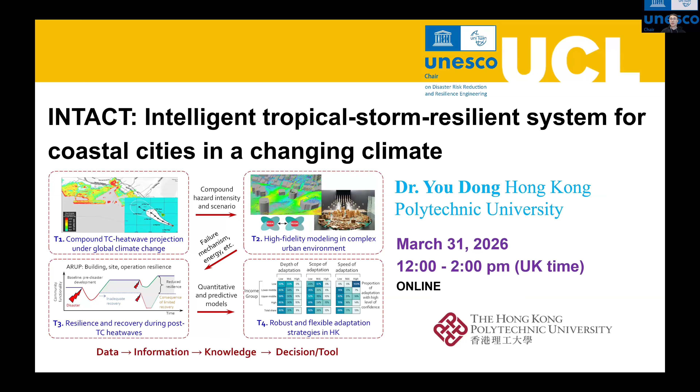Today's webinar. So the topic of today's webinar is an intelligent tropical storm resilient system for coastal cities in a changing climate, which is a very interesting and very relevant topic.

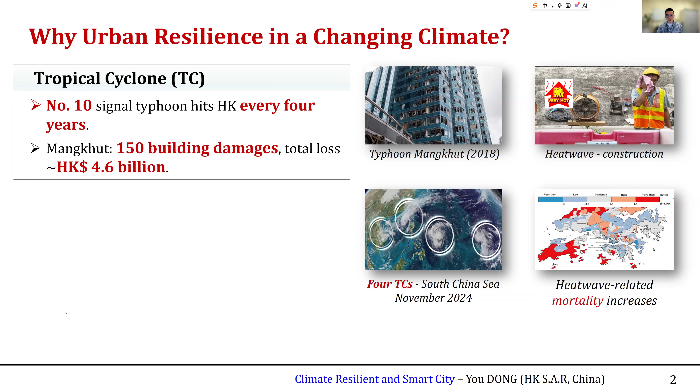I think the research challenge for engineers is how we could do the performance quantification in a life cycle context with different types of uncertainties. So this is for life cycle engineering. In my PhD, I worked a lot on how to do life cycle assessment and also prediction. We know that within service life, the structure has different deterioration and aging effects, and within service life it could be under different hazards like extreme events.

Then we do the repair, we should do the maintenance. And with the evaluation procedures, we have different types of uncertainties. We have to take the uncertainty into consideration. And we also have to consider the stochastic process with climate change and different hazard scenarios. By considering climate change, the stochastic process may become a non-homogeneous Poisson process. So this can become a more complicated stochastic process. So how to do this kind of evaluation is really, really important.

So when we try to evaluate climate change effects on coastal infrastructure to develop more resilient infrastructure, first we have to do this kind of quantification and prediction. It means we have to quantify the life cycle prediction and the multi-hazards by considering degradations like chloride-induced corrosion and carbonation. So we have different deterioration scenarios. But this is also quite a challenging problem because we have to consider different stochastic models. It's not only just PDF and CDF, we also have different stochastic processes for the hazard occurrence.

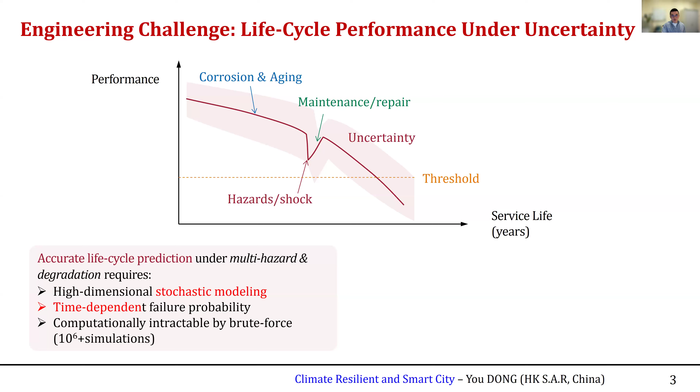By considering climate change, the hazard pattern may also change. So we have to consider different stochastic processes. And then we have to quantify the time-dependent failure probability, not time-invariant, by considering different hazard scenarios. We can use Monte Carlo simulation, but this is really time-consuming. That is the reason why in these evaluation procedures we can incorporate physics-informed AI to develop high-fidelity time-dependent assessments.

So based on this time-dependent reliability analysis, we could predict the infrastructure performance by considering different hazards and also climate change effects. So this part is regarding how to evaluate the condition within the service life of our coastal infrastructure, within 75 years or 100 years, how we could evaluate their time-dependent performance. So this is regarding performance assessment and prediction.

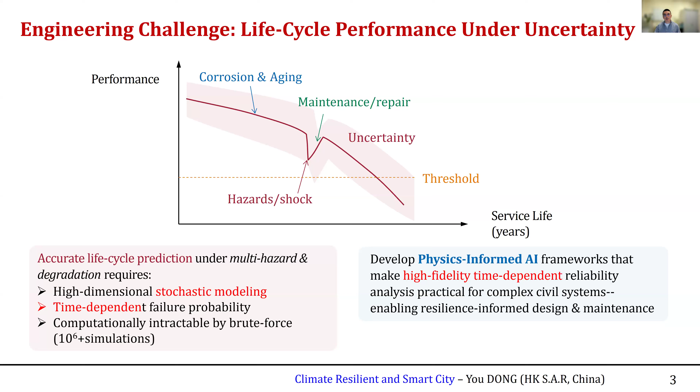Once we have this kind of prediction as an engineering problem, then we could consider their performance. We could consider durability from the material level to the structure level to the system level. And within the design, we have to consider different types of limit states. We have the ultimate limit state, serviceability limit states, and extreme event limit states. The extreme event limit state is maybe more relevant to resilience. But for the other limit states, we have to consider reliability and risk.

So based on their performance, we can do the evaluation and the prediction, then we could determine their time-dependent performance and also calculate the life cycle cost. So this is regarding the decision-making part. Previously we did this kind of evaluation for time-dependent reliability, risk, and resilience. I think the next step is how we make the decision. We have different types of objectives. We want to improve the performance, reduce the risk, improve the reliability, and improve the resilience within the life cycle. So this decision-making process is like an optimization problem.

Within the optimization problem, we can use different optimizers to solve these problems. But with climate change, once we include different types of uncertainties in this stochastic environment, we could think about how to use deep reinforcement learning to solve these problems. So this is within our research group. First, we try to do long-term predictions by considering future climate change and different types of uncertainties for time-dependent reliability and risk quantification.

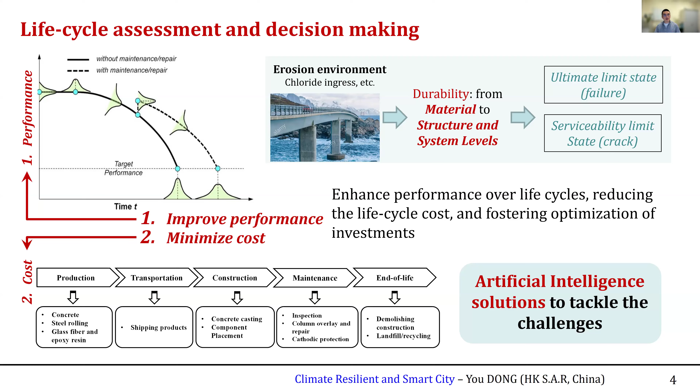After that, I'd like to take wind engineering as the example. This is our work with my previous postdoc, Jiayao Wang. Now she's a postdoc at Notre Dame.

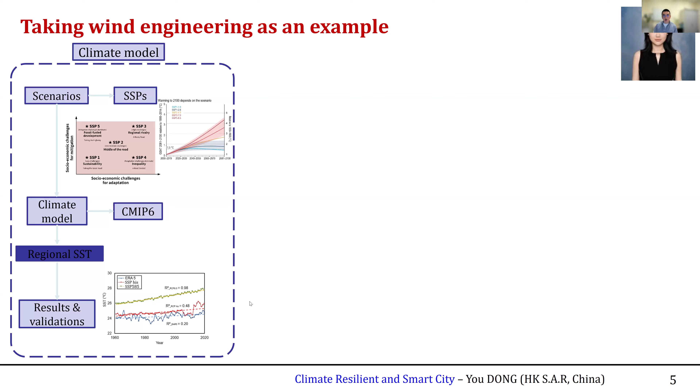For instance, first we do this kind of large-scale climate change modeling. We have different scenarios, SSP, RCP, and we also do this kind of downscaling from large scale to the regional scales. Then we could determine what the climate change effect is on our regional scenarios. Then we have to evaluate the climate change effect on the wind parameters, like on the wind speeds, on the wind directions, and we have to consider different wind profiles with and without climate change scenarios.

This is a kind of multidisciplinary approach. We have to work with climatologists. They give this kind of climate modeling, and we are doing the downscaling to evaluate the future climate change effect on the wind profile.

Once we have this kind of loading, we have to evaluate the infrastructure performance with and without climate change scenarios. We have to use the fragility model. We have to develop the failure probability under different climate change scenarios. So out of that, we could quantify the fragility. We could identify the vulnerability model. And we also do this kind of quantification for risk. I mean, we have to consider different types of consequences: we have the direct consequences, and we also have the indirect consequences.

Besides that, we also try to incorporate the sustainability and the performance indicators. So this is what I mentioned before. We could include different types of indicators in the decision making, in the evaluation procedures, like reliability, risk, resiliency, and also sustainability. And then we could use different optimization algorithms to determine which type of action we could use to enhance the resiliency of our coastal infrastructures.

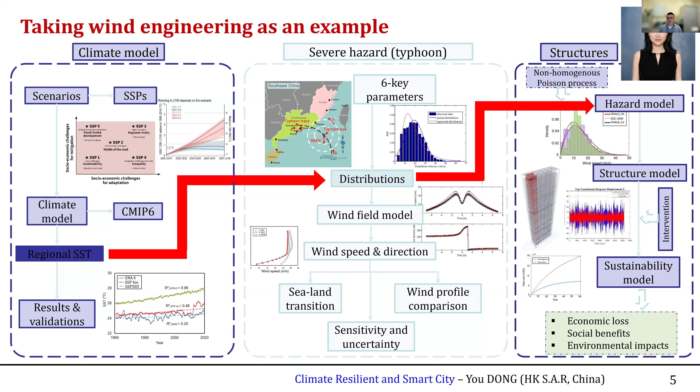Again, this is really quite interdisciplinary research. We have collaborations with people from climate science, but here we emphasize how to evaluate infrastructure performance under different climate change scenarios. Then based on this kind of prediction, in the future we will do adaptations by considering the climate change scenarios.

Overall, this is our group mission at PolyU. We really try to enhance urban resilience, like for the urban coastal infrastructures. And then we try to develop different adaptation strategies against compound hazards by considering the climate change scenarios. That means we have to work on the coastal bridge, coastal building, considering the dependency and the interdependency among different infrastructure systems. So based on our evaluation and prediction, we could think about how we could do the adaptation for our coastal infrastructures.

And this is the general approach. To solve these big problems, we have developed this kind of multidisciplinary group. We have people working on the climate change modeling. Then we focus on the coastal infrastructure. We do the downscaling to see what the flooding and winds are on coastal infrastructure. This means that we emphasize extreme hazards. Then we evaluate the effect of extreme hazards on the coastal community, what the damage is. We have the direct consequences, we have indirect consequences.

Besides that, we want to emphasize the recovery. We all know that resilience emphasizes recovery, emphasizes functionality. So we work with social scientists to evaluate the effect of climate change and extreme hazards on humans, from the socioeconomic perspective. Last but not least, I think the policy, the decision making, is also important. By using decision making, by using policy, we can make sure that our research outcome can benefit our society.

Again, we have formed this kind of interdisciplinary research group at PolyU, at our faculty. My part mainly emphasizes how to do the risk and resilience quantification, how to evaluate performance, how to do the prediction for the coastal infrastructure by considering the climate change effect, different types of uncertainty, and stochastic processes. And then we try to make decisions regarding the retrofit, regarding the adaptation of the coastal infrastructures.

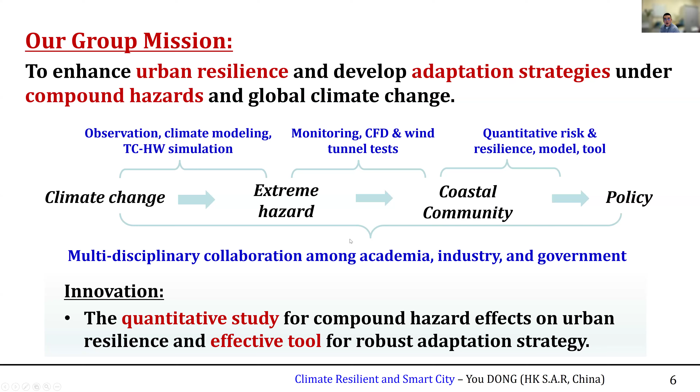I divided my presentation into two parts. In the first part, I would like to talk more about this kind of evaluation, this kind of assessment. Because once we do this kind of performance evaluation, we have to consider different types of uncertainties. We have uncertainty from the structure deterioration. We have uncertainty from loading; earthquakes and hurricanes are stochastic processes. So we try to develop surrogate models and also this kind of uncertainty quantification.

And also within this kind of time-dependent reliability analysis, we try to think about how we could use AI to solve this kind of problem for this kind of uncertainty quantification. So based on this kind of uncertainty quantification, then we could evaluate what is time-dependent reliability, what is their performance under different loading scenarios. So this is the performance evaluation part.

I'm sure that we are all quite familiar with this kind of surrogate model for uncertainty quantification. We have maybe a large simulation, a high fidelity finite element model. Once we run this kind of model, we have different inputs from the structure parameters, from the loading. We could have different types of observed data. So this red point is the data. Then we could develop different types of surrogate model, like Kriging model, PCE. We could use different types of surrogate model.

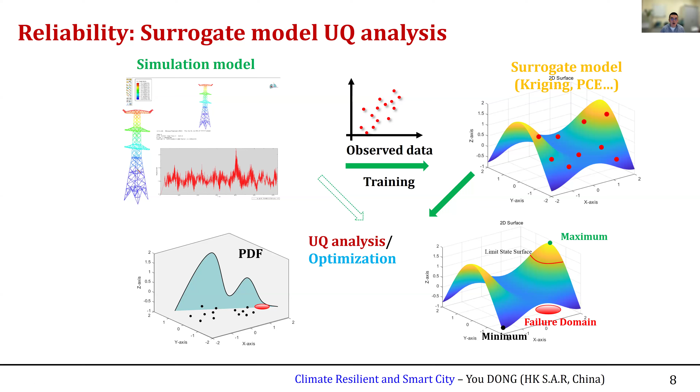But for this kind of time-dependent reliability, we may emphasize the failure domain. We more emphasize the failure domain. For this reason, we could do this kind of uncertainty quantification on the failure domain. We could do some optimization within this uncertainty quantification part. One of the used methods is adaptive learning, the adaptive Kriging models, and this is kind of a benchmark model for uncertainty quantification. I think we are quite familiar.

First, we have to determine the DOE, design of experiments. We have to identify the candidate pools. Then we could develop the Kriging model. But within this process, we could do different types of modifications and improvements to enhance the computational efficiency and also to improve the accuracy. So it means that we can change the learning functions, we could use different learning functions, and also we could change the stop criterion. In this way, we try to make this uncertainty quantification more efficient. I mean that we do not have to use 10 points. Maybe we can use 5 or 3 points and achieve good results.

So within my research group, because I have joined Poly for around 10 years, we have done a lot for time-dependent reliability analysis. Basically, for time-dependent reliability analysis, we could base it on sampling-based methods like Monte Carlo simulation, importance sampling, subset simulation. This is high accuracy, but if we involve a high fidelity model, this is quite time consuming, so then we could develop the surrogate model. This is also one option.

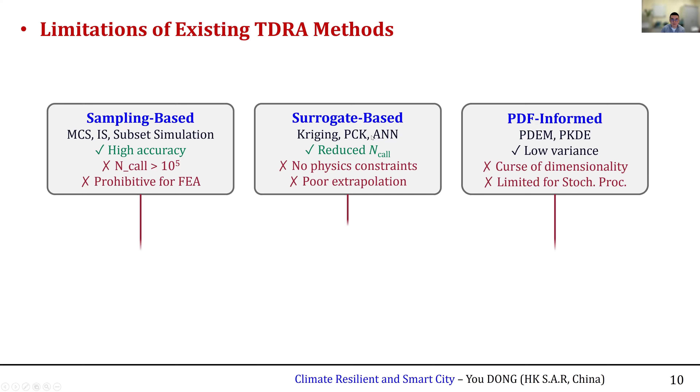Besides that, we could also use probability density informed methods like probability density evolution, kernel density estimation. But this approach has the curse of dimensionality and also cannot be well applied to stochastic problems. So this is the main reason in our research group we have done lots for uncertainty quantification. We try to do time-dependent reliability analysis, so we have to consider different types of stochastic processes. We try to evaluate what is time-dependent reliability.

So here we try to integrate the point-evolution theory with physics-informed AI techniques to solve different types of problems. But here we do not try to say that AI can solve all problems. Only for specific problems, we think we can use AI like PrINN to solve them. So this is our approach.

Generally, our overall goal is the assessment and prediction procedure, because resilience more emphasizes extreme events. The extreme event is a kind of stochastic process. We try to evaluate under this stochastic process what is the infrastructure failure probability. Given this failure probability, we could quantify the risk, and also we could follow up with resilience quantification by considering the functionality and the recovery strategies.

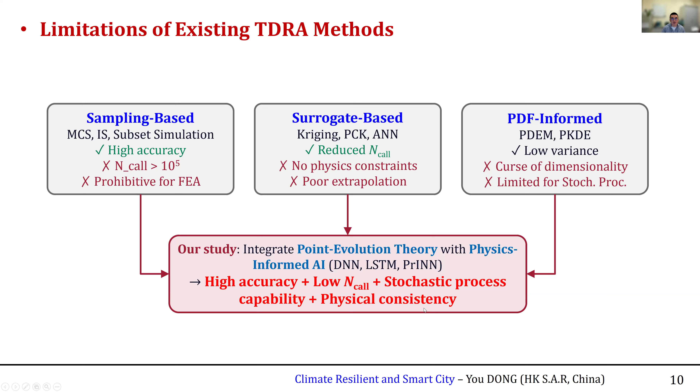Here, for our proposed approach, we generally can achieve high accuracy, and also we could consider the stochastic process, because hazards definitely are a stochastic process, and we could incorporate the physical information within the time-dependent prediction procedure. First, I would like to present three algorithms that we have developed in our research group.

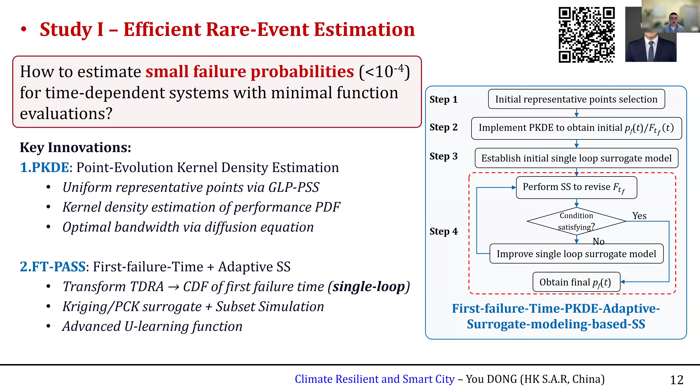This is a general computational problem. Using this approach, we could solve the failure probability for these kinds of smaller failure probability events.

You can see here how we propose this single loop idea. By using this one single loop idea, compared to the traditional double loop where at each time step tk we have to do this kind of analysis...

With the single loop idea, we only have to compute the tf, the first failure time. This way, we could significantly improve the computational efficiency.

Another thing I would like to emphasize is the tail. We know the tail is really important considering climate change, because climate change will bring more severe events, meaning we have to quantify the tail behaviors.

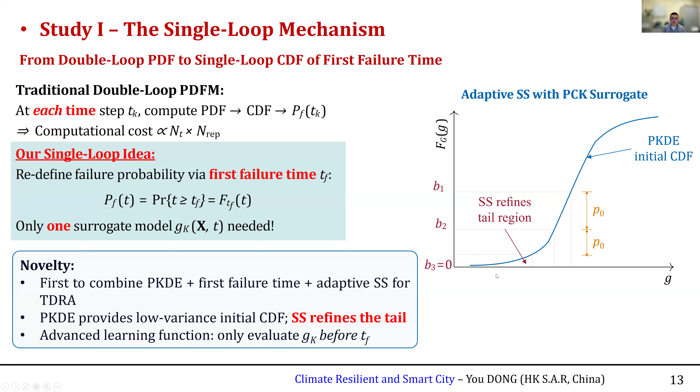This is the reason why we're using subset simulation to refine the tail region, so we could have more accurate estimation for the failure probabilities.

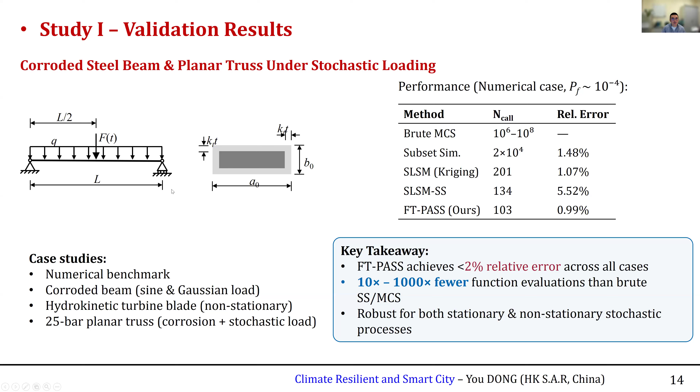We also demonstrate the validation of our proposed methods using different types of structural systems and different loading, for simple cases. We also evaluate some more complicated cases, which you can find in the paper.

The second method is that we also try to evaluate probability-informed neural networks for time-dependent reliability analysis. Here we really emphasize on the time-dependent reliability analysis, trying to integrate physical laws within a pure data-driven approach.

When we try to establish the loss functions, we develop different types of loss functions. We have the boundary conditions, the inner points, and also we incorporate physics-informed loss. The physics-informed loss means we try to refine the PDF, with constraints using generalized density evolution equations.

So we have this physics-informed loss. Within the total loss function, we try to incorporate the data loss and the physics-informed loss. This is how we develop this loss function. Using it, we could predict time-dependent reliability analysis under different loading scenarios.

I will not go into detail here, but this is how we develop the loss functions. We have boundary conditions, initial conditions, data, and physical equations. We also compare our results with and without physical information.

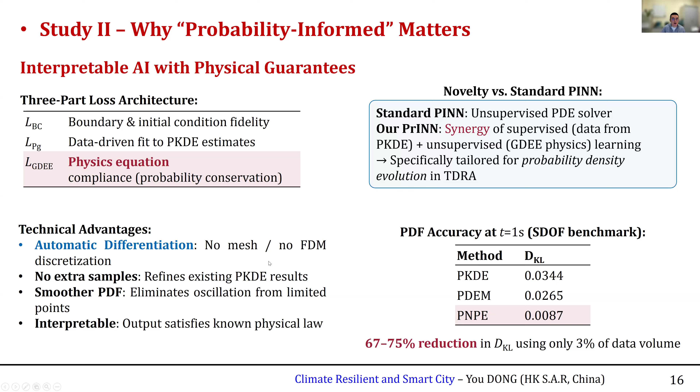Again, we really try to demonstrate our approach in different examples. As you can see here, we have different types of cases, and we found that our algorithm can solve these kinds of problems.

Also, I think domain knowledge is really, really important. Everyone talks about how AI can solve many problems, but if we want AI to solve a specific problem, we have to incorporate domain knowledge.

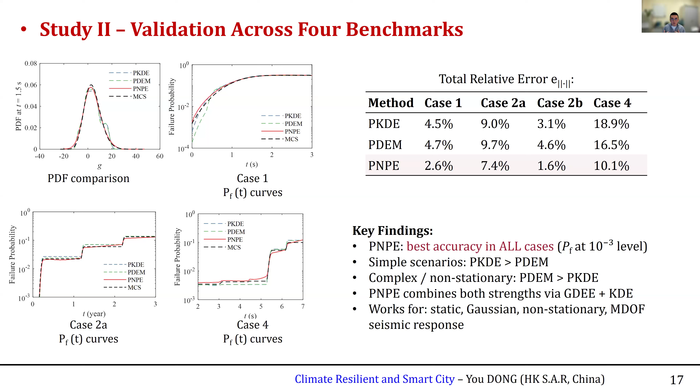This is the main reason we have to incorporate the PrINN within the performance assessment procedures. This is also our recent paper, where we try to consider stochastic process inputs. As I mentioned before, we consider resilience, which is emphasized on extreme events, because most extreme events follow certain types of stochastic processes, like Poisson process or non-homogeneous Poisson process. We have different types of processes.

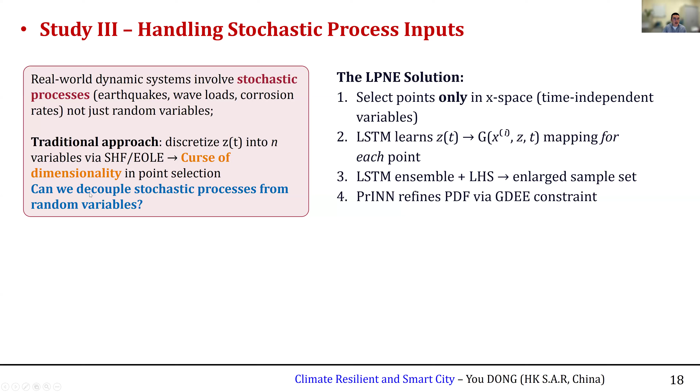Within the time-dependent evaluation process, we have to take into account this kind of stochastic process and consider regions. But the traditional method has curse of dimensionality problems. So this is the reason why we have to decouple the stochastic process from this kind of random variable.

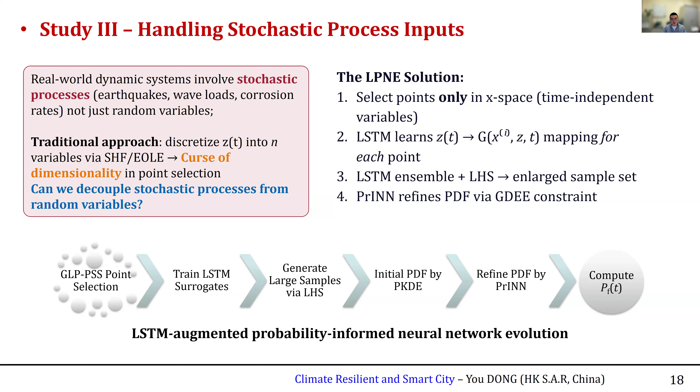Then we could compute the failure probabilities. Again, this approach can really solve the problem when we have different types of stochastic processes. We use long short-term memory and we could train this kind of model. We also use the PrINN, as mentioned before, to incorporate the physical law. This is really important when we try to develop this kind of loss function.

So this is the core innovation, as shown here. For this core innovation, we really try to do this kind of decoupling, because we have different types of stochastic processes. We try to use low dimension problems, and we use long short-term memory to handle this temporal dependency. Then we could achieve this kind of computational efficiency.

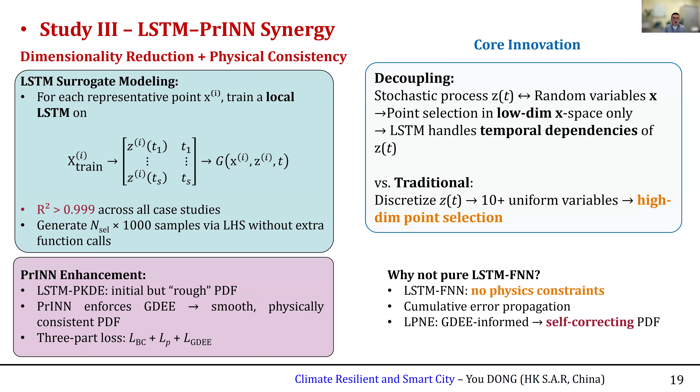Again, we do validation for our approach by using different benchmark examples. The benchmark examples are important. We compare our proposed algorithm with the benchmark and existing methods to see what is the efficiency for our proposed methods.

Beside the time-dependent reliability analysis, before we try to develop this kind of mathematical foundation for time-dependent reliability analysis, based on this kind of algorithm, we could determine the vulnerability. We can determine the failure probability. Giving different hazards, giving different stochastic processes, we could identify what is the failure probability and vulnerability for our coastal infrastructures.

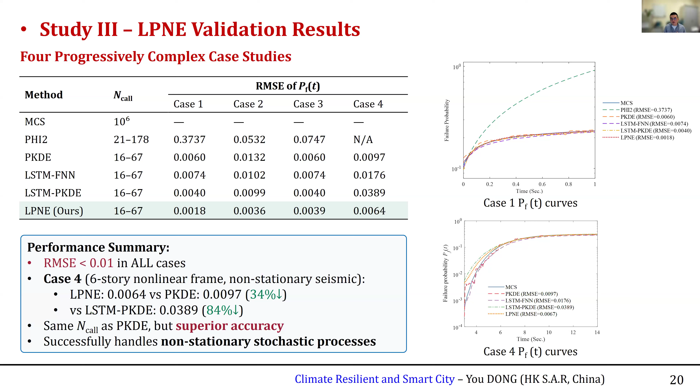And also we try to quantify the risk. Risk means the probability times the consequences. We could identify the risk, and we have direct consequences, indirect consequences, and we try to incorporate sustainability - not only the economic but also the socioeconomic aspects within the evaluation procedures.

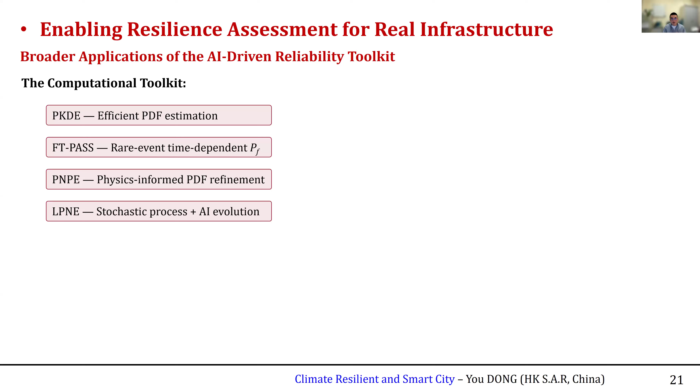And also, we do have different types of real world applications for offshore wind turbines, for coastal infrastructures, like bridges, buildings, offshore wind turbines. We try to evaluate the time-dependent reliability, the vulnerability for coastal infrastructure under different hazard scenarios.

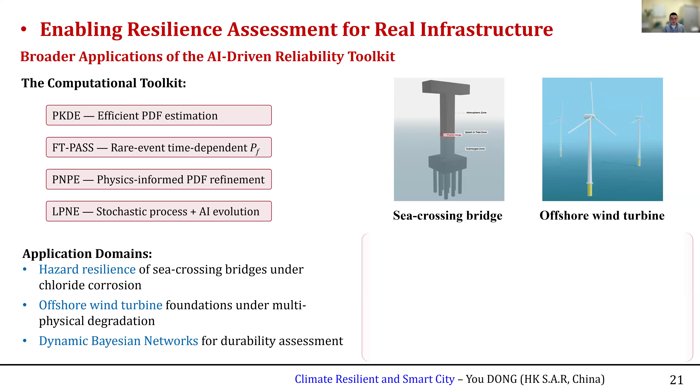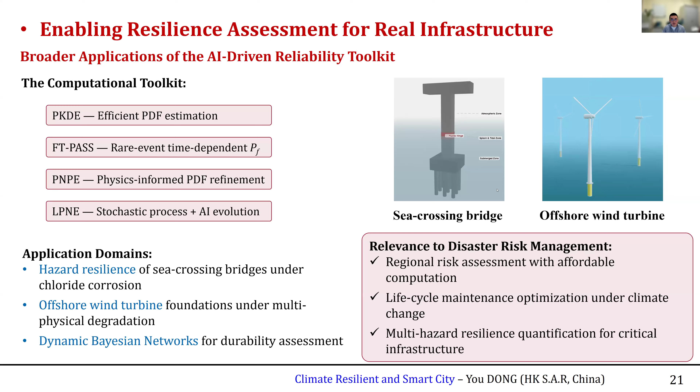Again, this is for the mathematical foundation for the time-dependent reliability analysis. Once we could compute the time-dependent reliability, we could also identify the consequences, like direct and indirect. We could do the risk quantification, and also risk management by using different types of decision-making tools. So this is for different types of applications, and also this is our current work.

We really try to focus on this kind of multi-physics informed transformer. Here we emphasize the wind turbine. We try to evaluate the stochastic process for the wind turbine under different loading scenarios. This is current work done by my previous two PhD students. We have to use physical knowledge in the transformer model, and integrate structure parameters into the inputs, but also consider other constraints, like dynamic resonance and control. This is how we incorporate physical information to train our model.

Then we could evaluate under this kind of multi-physics scenario what the failure probability is for different coastal infrastructures. Besides that, we also have one PhD student who worked on the power system.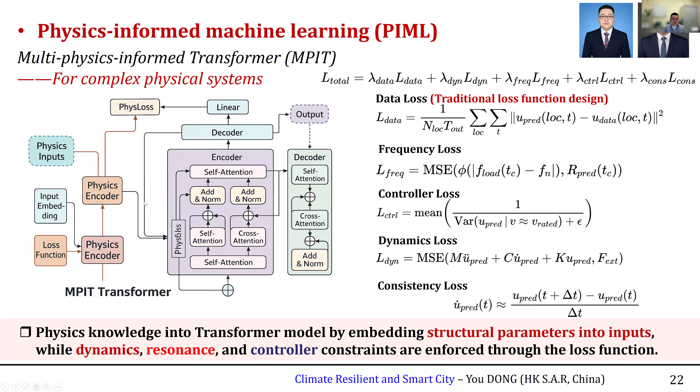We also consider the dependency and interdependency for the power system and other infrastructure systems. We try to quantify at the system level how we could quantify the resiliency. Based on this kind of evaluation, we could do the adaptation and decision making, which in my point of view is really, really important, based on the evaluation and predictions.

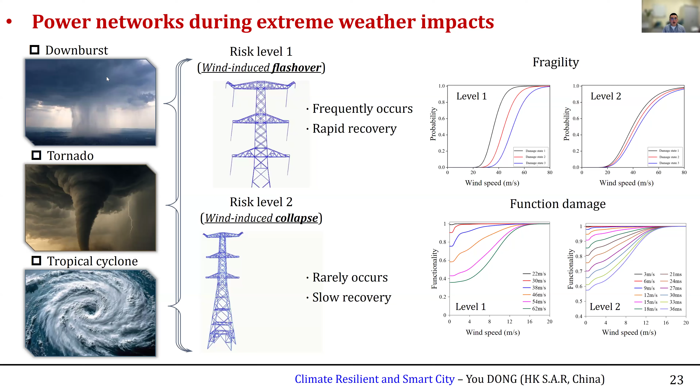As mentioned before, given the reliability and vulnerability models, we could easily quantify the risk. We could quantify direct consequences and indirect consequences, because there are different types of consequences. Probability times consequences gives us the risk. But within risk quantification, we also have to consider hazard scenarios, because they have different types of stochastic processes.

Besides risk, we all know that nowadays resiliency and sustainability are also quite important. In my opinion, resiliency is also quite an interdisciplinary approach, not only from the engineering perspective. When we try to quantify the resiliency, we first have to give the vulnerability.

Then we have to consider the recovery scenarios, the socioeconomic perspective, and we have to evaluate the health effects on human beings -- the humans who use the infrastructures. We also have to consider dependency and interdependency, because that is quite relevant to the recoveries, like considering the dependency and interdependency effects on the resilience quantification at the recovery stage.

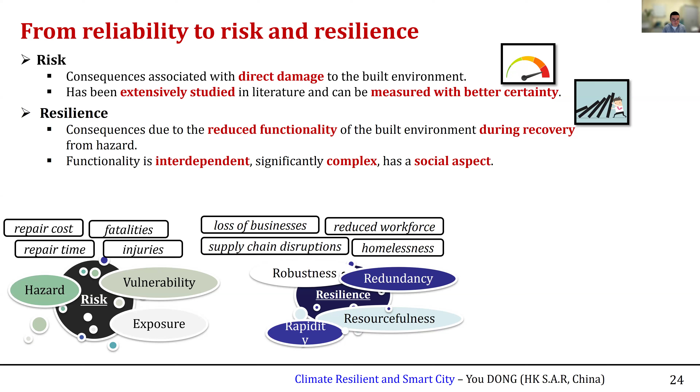And also in our research we consider sustainability. Sustainability means that we not only care about ourselves, but also care about our future generations. We have to consider the social aspect, economic aspects, and environmental perspective, like considering carbon emission and energy consumption. That is related to recovery regarding adaptations.

So this is based on time-dependent reliability. We could consider different performance indicators -- going from one performance indicator to different performance indicators. These different performance indicators have different relationships, but they also emphasize different perspectives. For resiliency, maybe this emphasizes more on large scale, functionality, and recovery.

Sustainability is maybe more of a big topic, but within engineering we have to think about it within performance assessment and prediction. We have to have a metric to quantify sustainability, like carbon and energy. I think this is also really, really important when we try to make adaptations for infrastructure under climate change scenarios.

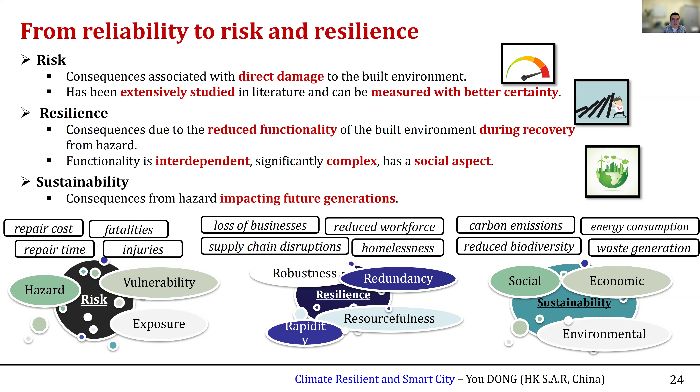So here is the risk resiliency platform, because once we have this kind of time-dependent reliability assessment toolbox in our research group, we also try to develop our own algorithms for resiliency and risk quantification -- from physical damage to downtime, because downtime is quite relevant to the indirect consequences.

And also because Hong Kong is a financial center, the financial loss from an economic perspective -- we think that is really quite important. We try to talk to insurance and reinsurance companies about how to do this kind of insurance research. And also the loss from carbon emissions, which emphasizes more the sustainability perspective.

Because of climate change, we move from stationary to time-variant methods under changing climates. This is also quite relevant because climate change will change the pattern of hazard occurrence, like moving from stationary to time-variant methods.

And we also have to emphasize recovery and mitigation -- not only mitigation, but also adaptation. That is also quite important for risk and resiliency quantification. And once we have these kinds of things, this is our recent project.

Our recent project: before, we emphasized this kind of tropical cyclone; now we have a new project that works on compound hazards. Compound hazards means that we try to evaluate the cascading effect. Cascading effect means, as we mentioned before, we try to evaluate how a single failure causes the whole system failure. We try to do this kind of network modeling because we have developed different types of vulnerability models for different infrastructure systems within the network. And then we have to evaluate how a smaller failure triggers the whole system failure.

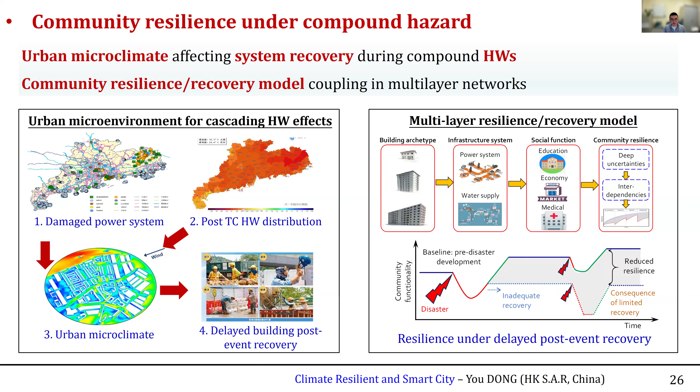I think this is also the current work because Hong Kong is a dense city; everything is highly connected. We are lucky that we have the local government support. We have data to do validation for some parts of our study. So we really get strong support from the Hong Kong local government. They emphasize climate change and climate adaptation. So this is the reason why we have formed an interdisciplinary research group to tackle this kind of challenging problem.

Also, based on this kind of evaluation, from my perspective, I think decision making is becoming more and more important. We're doing this kind of evaluation, this kind of prediction. But I think the final goal is to make sure that our final products, our final outcome, can be used by the decision makers, maybe the government, the insurance companies, to do decision making. So this is the second part I try to talk about, decision making. I still have time. For the decision making part, again, this decision making is from the engineering perspective.

We have to develop this kind of mathematical foundation. I think math is really important. We have to rely on the math to explain why the physical model is important. Then we have to develop this kind of computational framework. The computational framework means that we should know the infrastructure system performance, their deterioration, their performance under different hazards, their vulnerability, the redundancy, the recovery, the resiliency, and also we have to take the cost into consideration, like repair, retrofit, recovery.

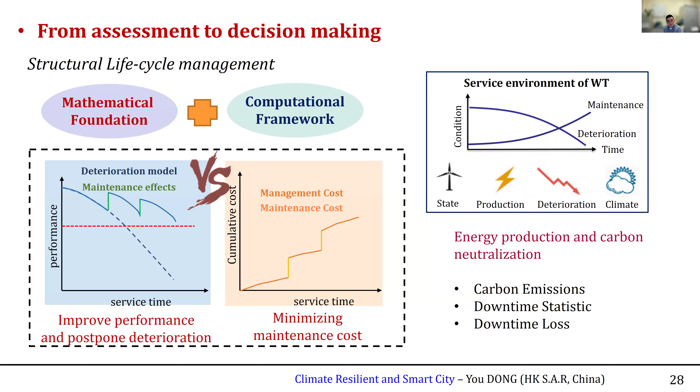So these are different types of conflicting objectives. So then we have to make the decision. That means we have to use different types of algorithms to solve this kind of optimization problem. Maybe we want to reduce the cost. We want to improve the performance. So this is a decision making problem. Within this kind of decision making problem, I would like to give a simple example that we use in surrogate-based decision making. This is the reason why at the very beginning I spent a lot of time introducing the surrogate model for time-dependent reliability analysis.

I think this is important because when we try to make a decision, we have to consider the future scenarios: the future loading, high probability, future climate change, deep uncertainty. So we have to develop this kind of surrogate model. I mean, we first have to have performance assessments, and also we have to develop surrogate-based optimization that we can use in the decision-making part. I mean, first we have to develop.

First we have to develop these performance-based assessments. We have been doing this kind of hazard assessment, considering the climate change. We have been doing the damage, different damage states. We have to identify the consequences. Then we could develop the surrogate model-based optimization.

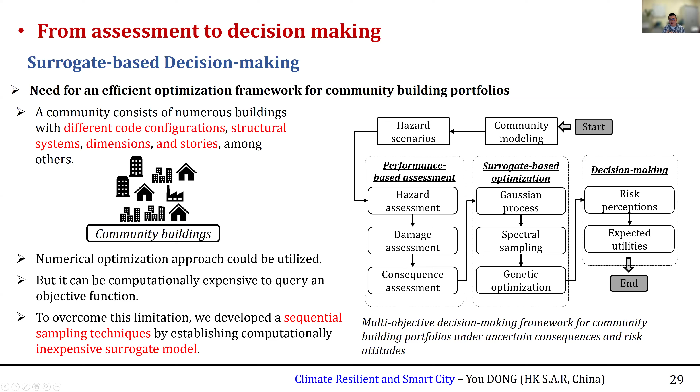And also we could do this kind of sampling. Then we can use different algorithms. We can use GA, we can use some other algorithm to solve these kinds of problems. But with the decision-making procedure, the attitude, the risk perception, that is also really, really important. We have to determine the attitude of the decision maker, risk aversion, risk taking, risk neutral, because that will affect the decision making result. So this is also quite important.

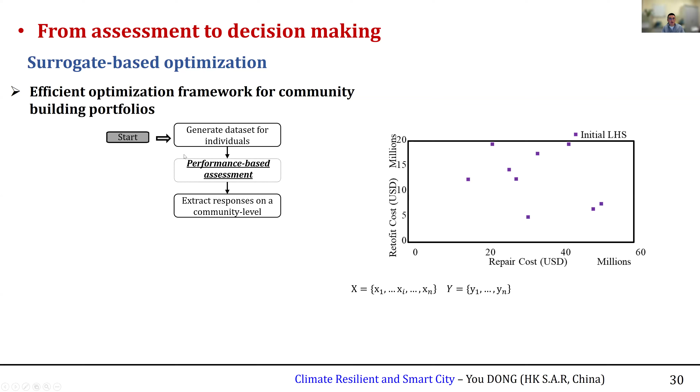You can see here, this is a kind of general approach. We try to do this kind of efficient optimization for the community. We want to, as the community, for the building portfolio, by considering the future climate change, by considering the future flooding, and maybe also the earthquake, see how we could do the retrofit. We have to study different data sets for the individual buildings. We do the performance-based assessments, and also we have to consider different return periods and different types of consequences.

Then we have to develop different types of optimization criteria. We want to reduce the cost. We want to improve their performance. Then we can use different optimizers to solve these kinds of problems. Also within the performance assessment procedures, we can use the expected annual consequences. But as I mentioned before, the decision maker attitude is also quite important.

This is the main reason we introduce the utility theory. By using the utility theory, we can consider the attitude of different decision makers. They can be risk neutral, risk taking, risk averse. Given different attitudes, the final result can be different. So in this study, we try to evaluate the effect of the risk attitude on the final optimum solution.

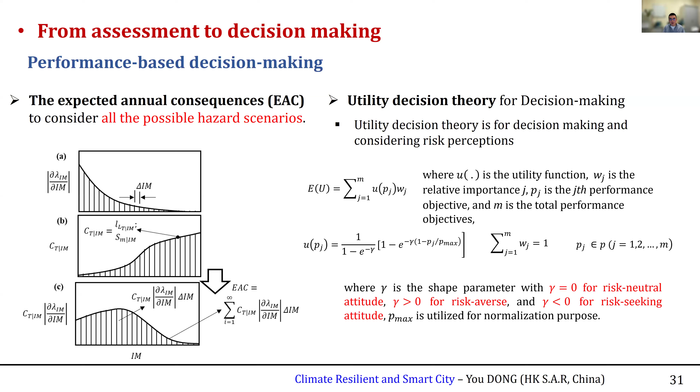Actually, here we have certain Pareto optimum solutions, and also within the optimization procedures, we could identify the design variables. We can design the objective, and also we can design the risk attitudes. As you can see here, we could consider different objectives. We want to reduce the cost, reduce the fatality, reduce the repair cost, reduce the repair time, and also reduce the emission and embodied energy.

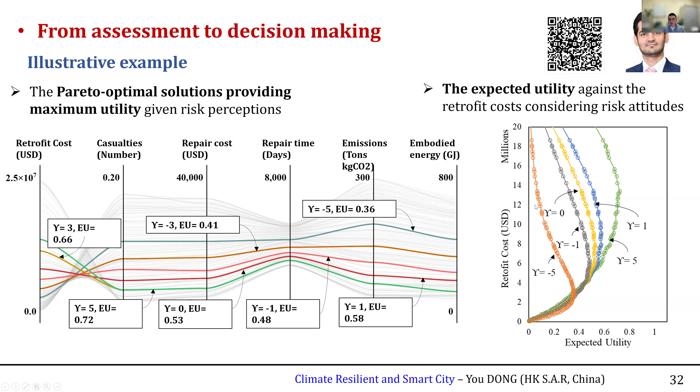But at the same time, we want to enhance the resiliency. So this is a kind of multi-objective optimization. We can use the utility theory by considering different risk attitudes within the decision-making procedures. This work was done by my previous PhD student, Ali, who is from Pakistan. And also, we compare our algorithm with the basic decision making, and we compare the surrogate model.

With the decision making, we want to improve the decision making efficiency by using different optimization algorithms. But this is one type of decision making problem, where we have to consider the design variables, determine the constraints, and use different optimizers to solve these kinds of problems. Right now, when we try to make a decision under this kind of stochastic environment, we can think about deep reinforcement learning.

Deep reinforcement learning is for decision making under stochastic environments. We have the agents and their interaction with the environment. We have to identify different types of actions, and different types of rewards. All this mathematical foundation we form in the POMDP, the partially observed Markov decision process. This is a commonly used method for decision making.

But within the decision-making procedure, we can have the data from health monitoring, from damage data, and we can input this information to solve decision-making under this kind of stochastic process. Here, we can use different algorithms like actor critic, like A3C. So we have different types of algorithms using deep reinforcement learning for decision making. We have applied this approach to different infrastructures.

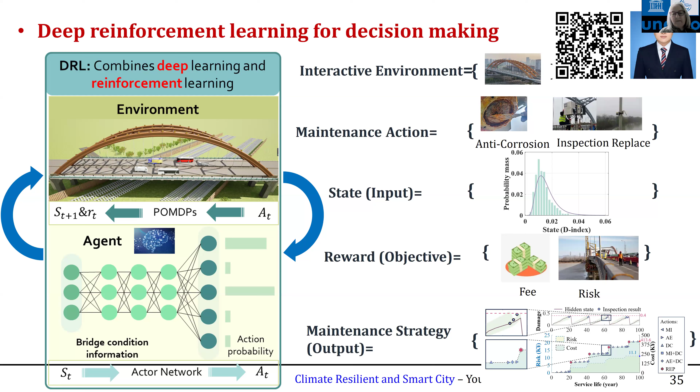Hi, Tommy. Would you be able to use the pointer when describing your slides? Because for some of our listeners, yes, that would be very helpful. Thank you.

Because there's something wrong with my mouse. I try to use that. Sometimes it's not working at this computer. Yes. Thank you. So, thank you very much.

So this is how we could identify. People can follow better, can identify different rewards, and also we could identify this kind of maintenance strategy. But here again, we really try to promote this method for the local governments, like in Hong Kong, doing the maintenance for the Hong Kong bridges.

Again, I think sometimes if you want to use this algorithm, like the partially observed Markov decision process and deep reinforcement learning, sometimes it cannot directly solve the problem, but by using this method, we can give different types of policy by considering different objectives.

And also, this is another work by my first PhD student. Right now, she's an assistant professor at Hong Kong Metropolitan University. For this study, Dr. Yaohan Li tried to emphasize decision making under deep uncertainty. We mentioned before that previously, decision making emphasized the optimal solution.

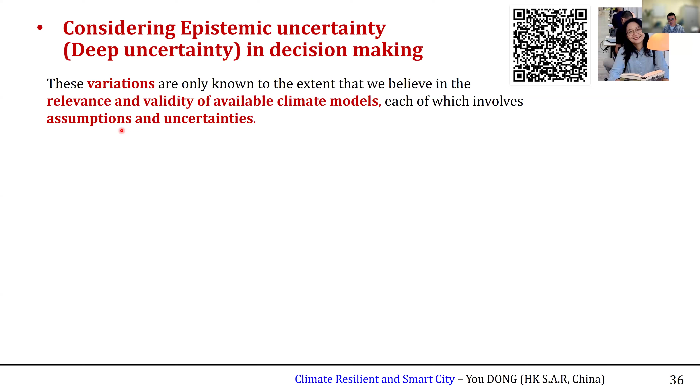But climate change involves deep uncertainties. We have different SSP scenarios, so there's deep uncertainty. This is why in her research, we try not to do only the optimization, but also to identify robust decision-making, robustness for the adaptation. I think that is also quite important.

We know this is the basic definition of deep uncertainties: we cannot use the PDF or CDF to identify the distribution, and we cannot fully understand these uncertainties. This is why we have to treat these epistemic uncertainties, and determine not only the optimum, but also the robust climate adaptations.

Again, this is also quite interdisciplinary because we have to identify the possible climate change scenarios. We have SSP, different scenarios. We have to identify which scenarios may work for our areas, because different infrastructure is located in different areas.

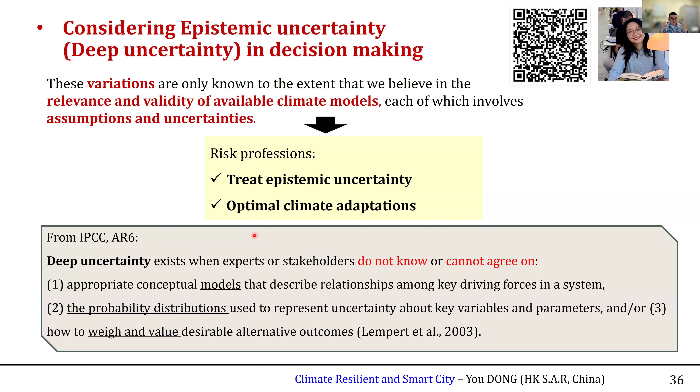And also we have to talk to the people working on climate change, talk to the local designers, then we can propose some solutions, considering the uncertainty and the real design and retrofit scenarios. We also have to consider the epistemic uncertainties, to make sure that our final adaptation actions can really solve real-world problems.

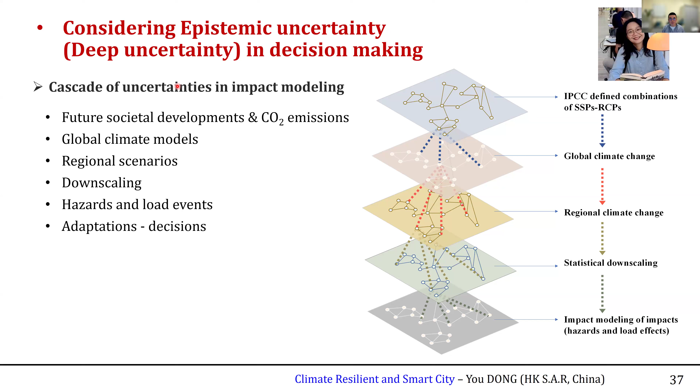I think within this procedure, dynamic decision making is really important when considering future climate change, because there are deep uncertainties within the decision-making procedures. Here Yaohan proposed a degree of belief in different models and epistemic uncertainties. Then within the decision making, we try to identify not only the optimal, but also the robust adaptation actions.

So this is also a collaborative research project that I worked on with Yaohan for a while, and Yaohan has some other collaborators, on how we could promote robust adaptation considering epistemic uncertainty. Here we refer to deep uncertainties; we cannot easily use the PDF or lower and upper bounds to identify this type of uncertainty. I think this is also quite important, how to make robust decisions considering future climate change.

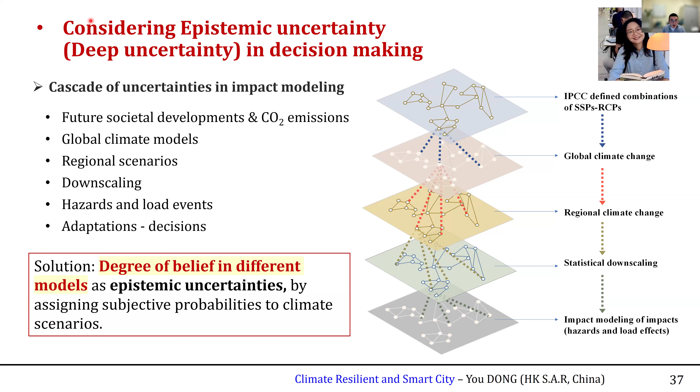Also, this is some of our work, where we try to do resilience quantification for infrastructure systems. How we could do resilience quantification before, during, and after the event, within the restoration stage; we have to consider different stages. At different stages, our emphasis is different. Within the pre-event, we have to identify the reliability, the failure probabilities.

Within the operation, we have to consider resourcefulness. We have to consider impeding factors, the event process, the recovery process. For the post-event, we also have to consider the recovery strategies. Besides that, this is only the engineering perspective. We also have to consider the socioeconomic perspective for resilience quantification.

Zai Shang has done a lot of work on human-centered resilience. I would be happy to have some collaborations. Again, I think resilience is really an interdisciplinary topic.

For the engineering, maybe we more emphasize on the vulnerability model, time-dependent reliability assessments. But considering the decision making, we have to incorporate researchers from other disciplines, other research areas, like for how to do the social aspect, economic aspects. We could identify different consequences. So based on this kind of evaluation, risk or resiliency, then we could make the robust and optimum decisions.

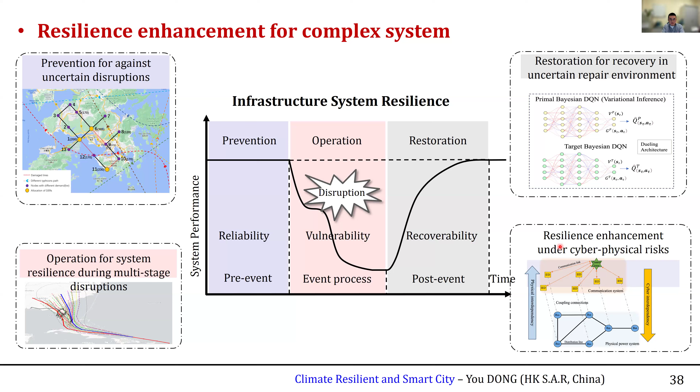So there are kind of key takeaways. I will not repeat here, but generally I think time-dependent reliability analysis is important. How to do the life cycle assessment is important, because my PhD worked on the life cycle. I mean, life cycle evaluation, prediction, how to assess the time-dependent reliability. I think this is the foundation for the risk and resiliency quantifications.

But once we incorporate the climate change, we have to consider the large scale, spatial and temporal large scale. We have to consider the cascading failure. We have to consider tail behaviors. So this is the main reason why in our group we emphasize on this kind of low probability, high consequence events. Last but not least, we think the climate adaptation is really a multidisciplinary or interdisciplinary research topic.

It's not me that's done all this kind of work. We have a project from the Hong Kong government. We do have this kind of interdisciplinary team to solve these kinds of problems. But as engineers, I think we have to make sure that our research outcome can really benefit the society, can benefit the governments. Also, this is the main reason why we have to think about decision making.

Regarding the decision making part, we have to identify optimal solutions. At the same time, because of climate change, again, deep uncertainty, we have to incorporate the robustness, like the dynamic decision making. I think that is really, really important. Again, I think this is really kind of an interdisciplinary approach.

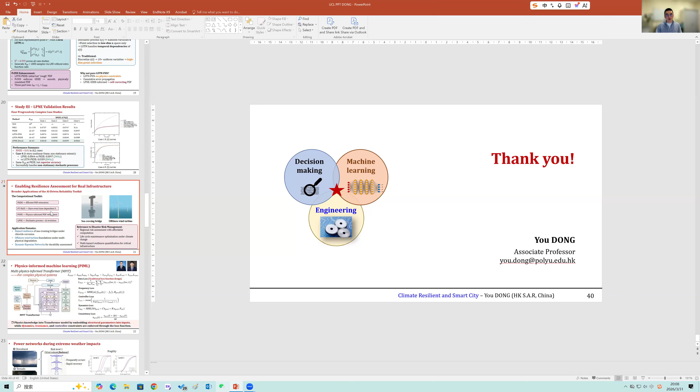And another question from Hassan is, can your model replicate elsewhere? Yeah, sure. If you send us an email, we are happy to share our code with you. I'm really open to sharing, because here we have different types of time-dependent reliability toolboxes and different algorithms for time-dependent reliability. We are happy to share the code. You can send us an email; I put my email address here. Yes, good. Thank you.

A question from an anonymous attendee is, what type of model are you using to incorporate the social aspect into infrastructure vulnerabilities? This is a really good question. For me, the social vulnerability index is really important. Today I talked a lot about engineering vulnerability models, where we see the capacity of the structure and the load from outside, develop the limit state function, and identify the reliability index.

But the social vulnerability is really important; it's the people who use these buildings. This is why in Hong Kong we try to identify the social vulnerability index for different areas, because income and language level differ. We collaborate with the social departments, who give us basic information. When we quantify engineering vulnerabilities, we introduce factors for the social vulnerability index, combining engineering and social vulnerability within infrastructure performance evaluation.

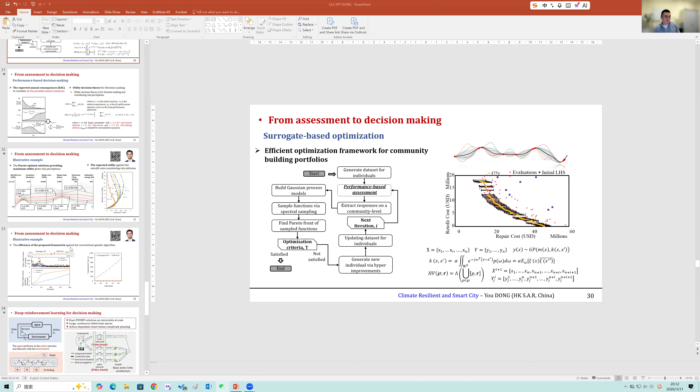This was the first question. The second one is in slides 36 and 37. You mentioned that we didn't want just the optimal solution, we wanted the robust one. Could you kindly elaborate on the definition of robust? Because somehow it passes through the optimal solution. How do you define that, how do you distinguish that this one is the robust one? Thank you for your questions.

First, regarding your first question about how to consider the uncertainties and also how to consider multi-objective optimization, I think you work on optimization problems within multi-objective optimization. We have different strategies to solve this kind of problem. One way is that we can combine multi-objective into one objective.

We could assign different types of weighting factors, and also transfer different consequences into a uniform unit. Then we could transfer from multi-objective to single objective. So this is definitely one way. But not with that, as you mentioned, we can use this kind of Pareto optimum solutions.

We can consider all these kinds of scenarios. We do this kind of optimization for the multi-objective. But again, this is a decision-making problem. We have to identify what is the attitude for the decision maker.

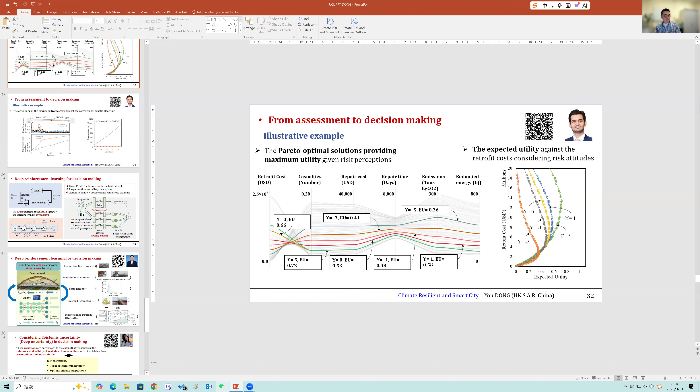Within decision making for climate change, because climate change involves deep uncertainties, we have to identify the most robust solutions. The robustness, we have to identify the regretness, different type of parameters to identify for this kind of robust decision making. This is similar to optimization, to the optimal solution. Maybe we have to identify the minimum value for the robust decision, and also we have different criterion to assess whether this kind of solution is robust or not. For more detailed information, I think you can scan these QR codes.

I think in this paper, by Dr. Yao Li - actually she's my first PhD student - she gave a more detailed explanation of how to treat the epistemic uncertainty, and how to make sure the decision making is more robust. I think you can find more information in the paper shown here. Or maybe you can send me an email, and I can send another paper we are working on regarding robust decision making.

Hopefully I answered your question. Thank you. Thank you so much. Yes, yes, thank you. Thank you, Abbas.

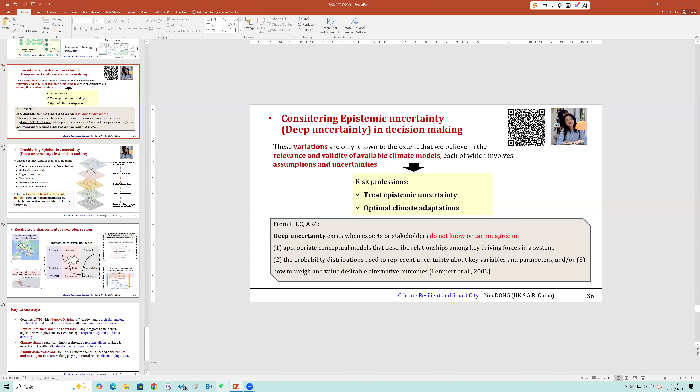Nowadays climate change is mostly artificial, man-made. So how can we increase the resilience of people generally in urban areas? Due to war scenarios, climate change is increasing very rapidly because a lot of smoke and war material is being thrown into the atmosphere.

This is not a question, just a comment. So how can people face this problem, because petroleum and other materials are also in shortage. So people are not able to become resilient in this present scenario.

I will try my best to answer this question. In my perspective, I think education is important. From academia, we develop fancy mathematical models, but the education has to make sure our language can be shared with the people, the people who live in the city.

Like in Hong Kong, we work on tropical cyclones. We try to have different types of education weeks. We invited people from high school, from other sister universities. We explain these things in layman language to explain what future climate change's impact is on coastal infrastructures. Maybe we rely on some kind of animations, different things to show people if we do this or that, different things, what are the possible consequences. Based on this kind of small videos, smaller presentations, we can educate our people, considering climate change, what we should do. If we do not do it right now, then we will have significant consequences.